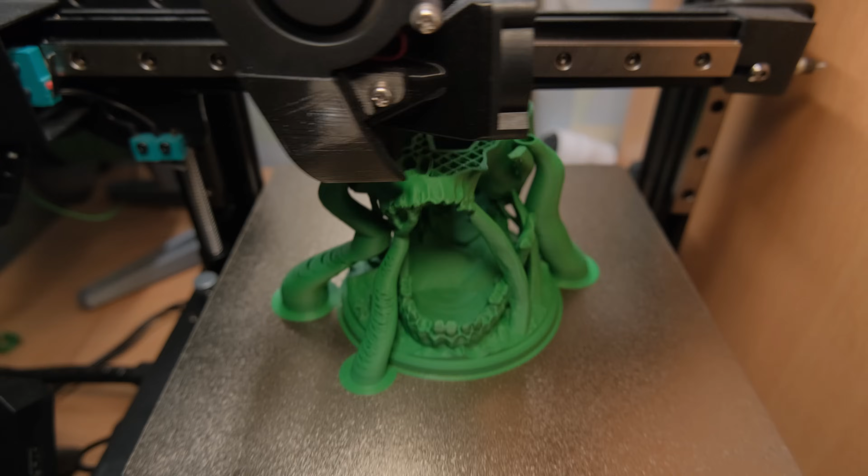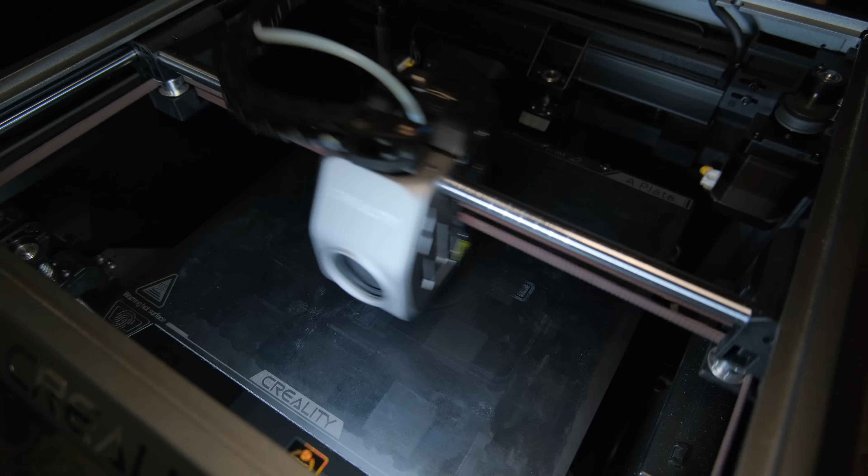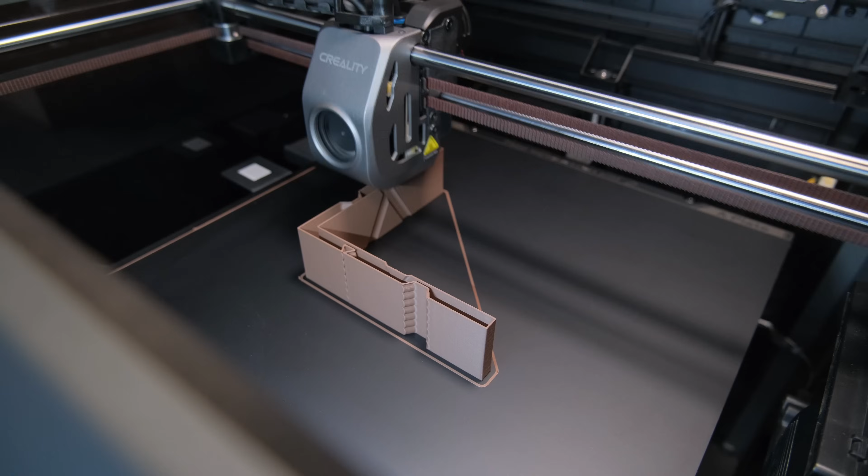Nowadays, almost any printer can make good looking prints. But prints like these hide all the inconsistencies, and unless we test the proper way, we'll never know the true print quality performance of these machines. So to properly benchmark that, I created a series of test prints that expose and will show the true capabilities of these printers. So do Creality K1 and K1 Max live up to the print quality standards of Bambu Lab's X1C? Well, you must see every test to actually get a grasp of what the real difference is.

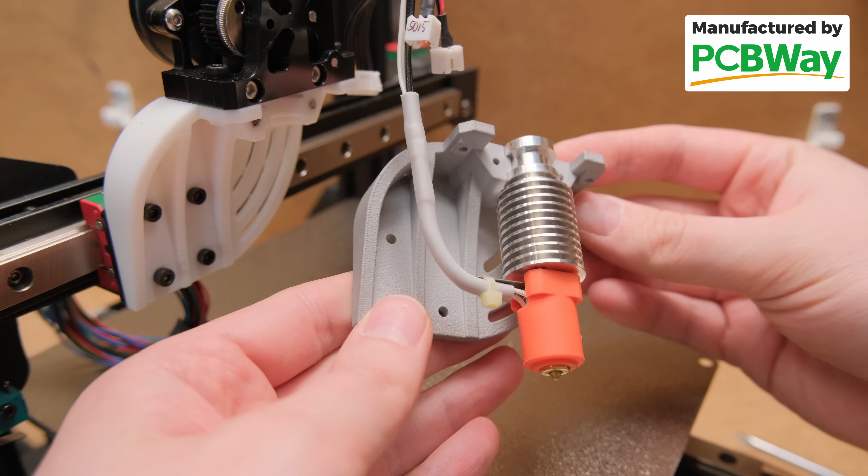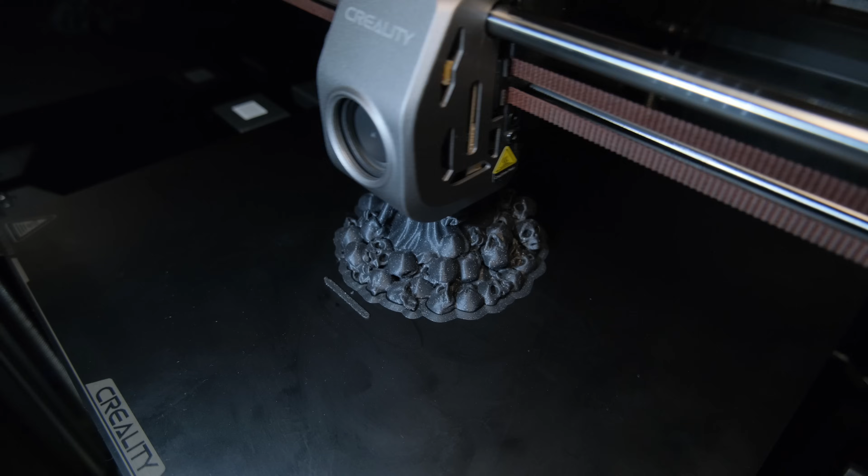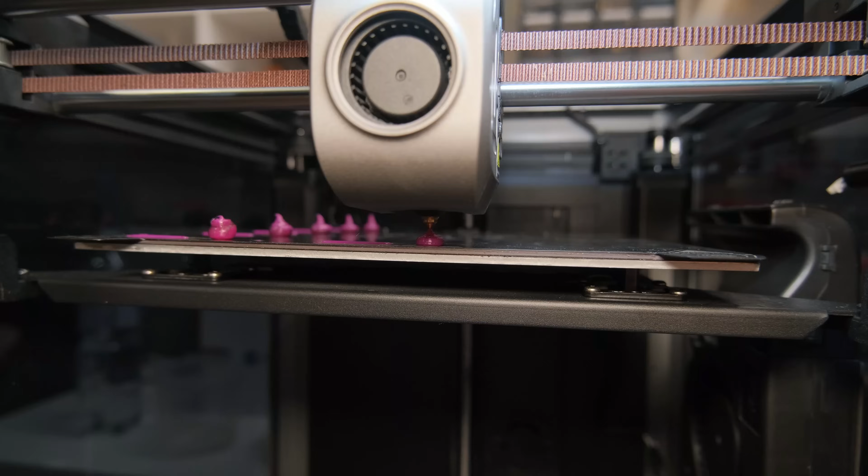A very important note before we dive into the testing results is that both of the printers were updated versions, both hardware and firmware wise, and they didn't have any mechanical problems as they were shipped in an insanely secure plywood case by Creality. I like to start with determining the actual max flow of the printers, as companies really like to overstate their numbers. And there was no surprise with K1 and K1 Max printers. Both fell short and capped at around 20 cubic millimeters per second of constant extrusion.

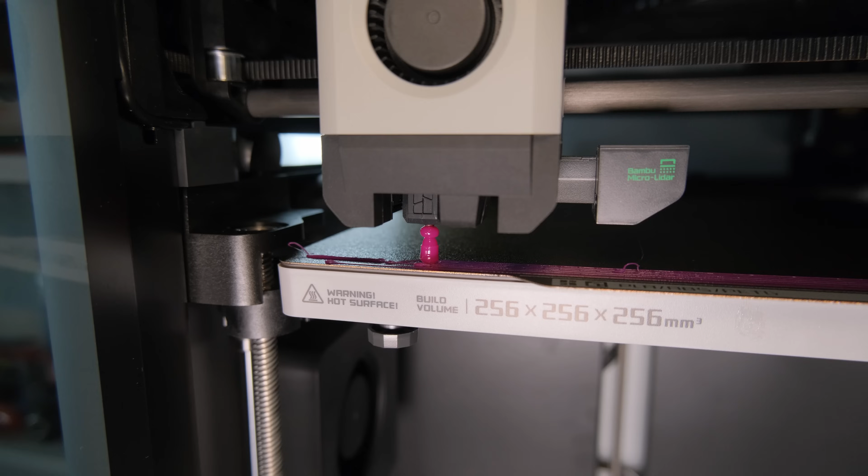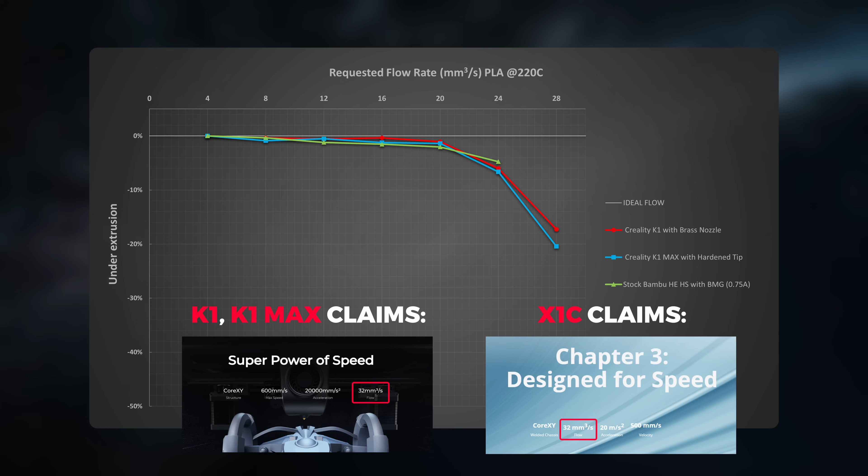Measuring the X1C hot end performance is impossible on the printer itself, as it prevents over extruding, but I have tested the hot end on another printer in the past and it started struggling after those same 20 cubic millimeters per second, so neither printer comes even close to those marketing claims. So great, they can both melt the plastic, but can they also sufficiently cool it down? To test that, I'm using my model, which is designed in a way that if it doesn't have any defects, the cooling is fully sufficient to print PLA with high overhangs.

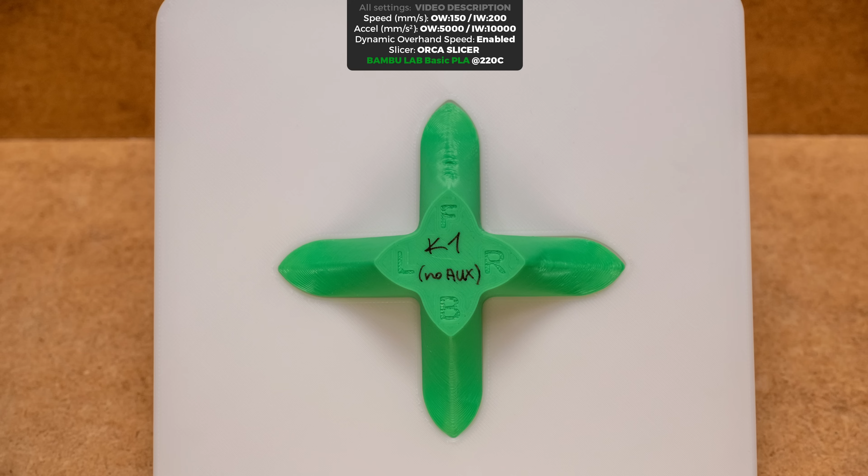The smaller K1 with only the printhead fan active performed great on the left and the back sides of the print. But it struggled with the front and just a tiny bit with the right side. This means that the fan duct doesn't have an optimal design to cool all sides equally. However, the print looks perfect if we additionally turn on the auxiliary fan. You might think that the cooling performance of a bigger K1 Max would be equal, as both printers have identical printheads. But because there's so much more hot air around from the heatbed, it performs worse in both same directions. But again, it all changes with the auxiliary fan on, making a perfect print.

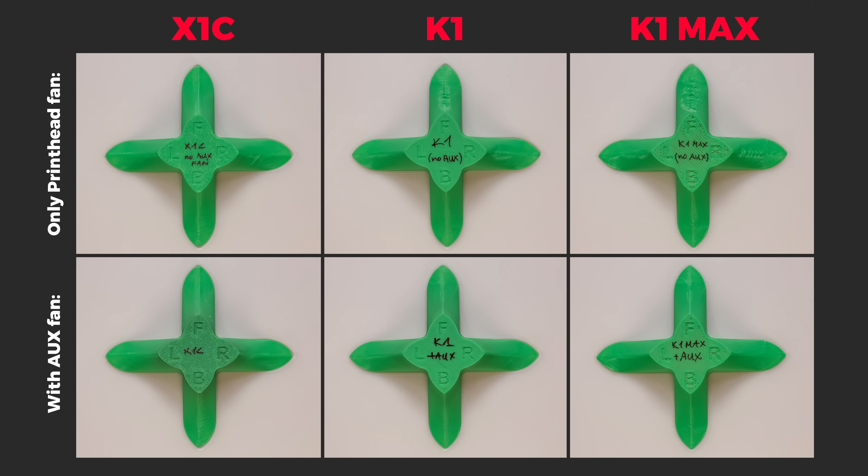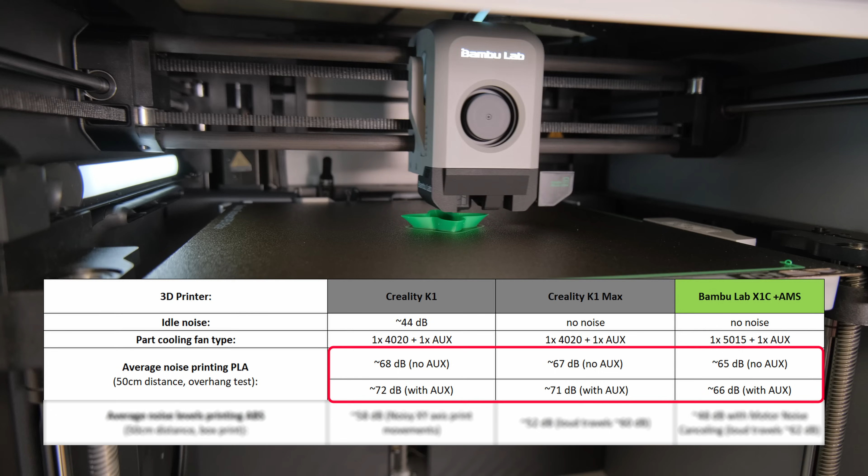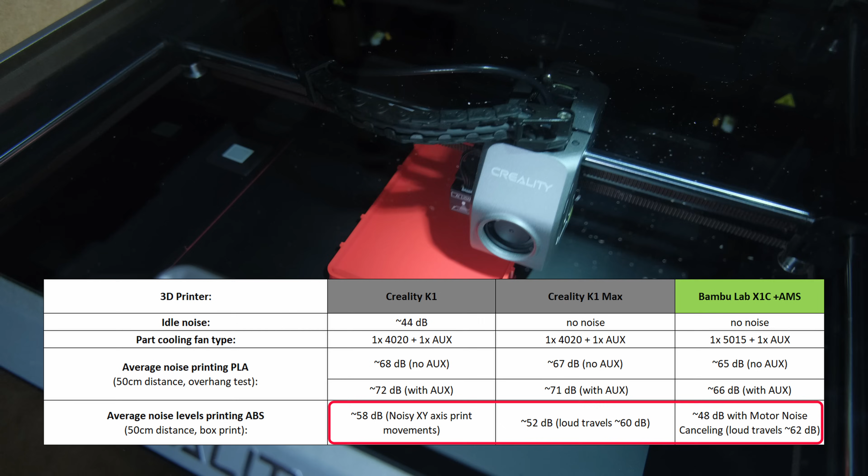In comparison to the Bambu Lab X1C, both K1 and K1 Max fall short when only using the fan on the printhead. And with the auxiliary fan turned on, all these prints look flawless. But what's impressive here is that X1C is beating both K1 series printers while making lower noise levels. But what about when printing enclosed? In this aspect, K1 Max feels the quietest overall, while X1C with a recent update that implemented motor noise cancelling makes a huge difference on straight lines. When traveling and doing fast movements, it is the loudest printer in this comparison.

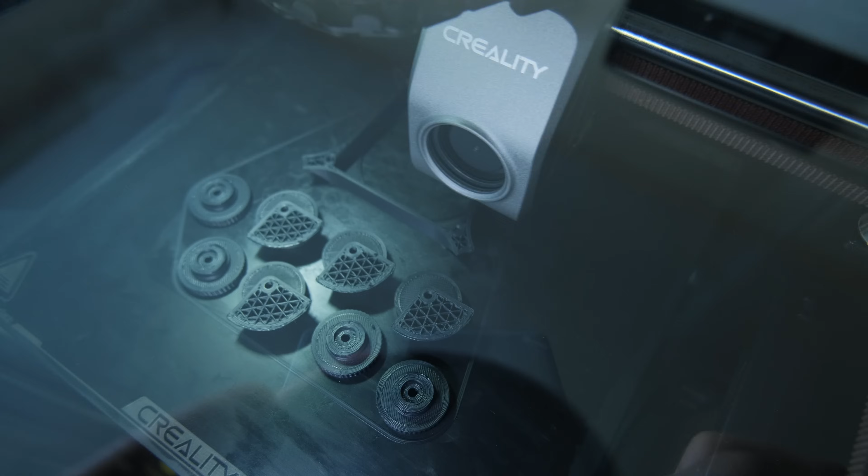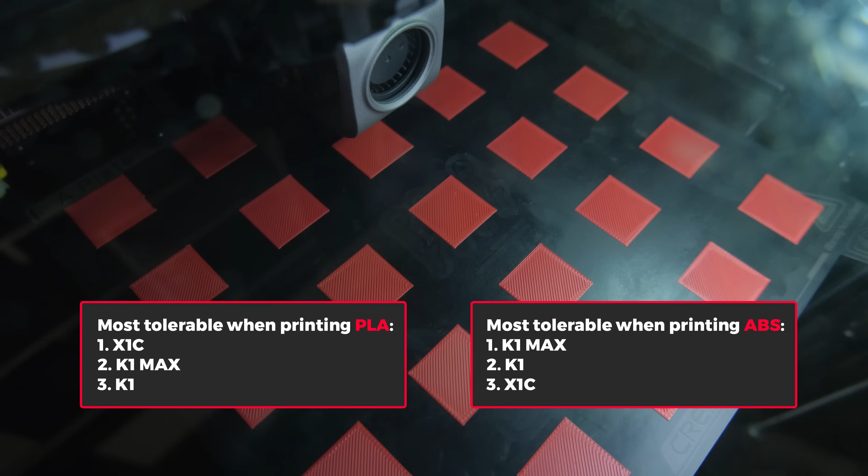The smaller K1 is a strange one, as when printing, depending on the speed, it makes all the frame resonate, and sometimes it can be way more audible than even the fans. But if I had to list them, the least annoying when printing PLA is X1C, and when printing ABS, the K1 Max. Next we have the extrusion consistency test.

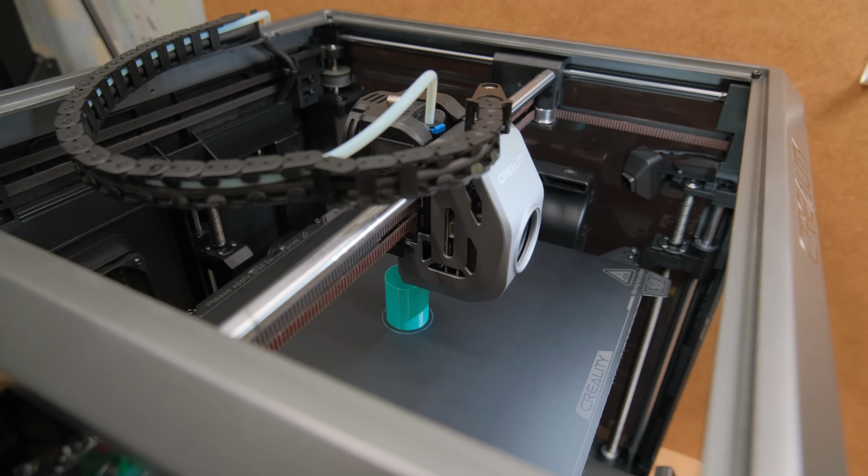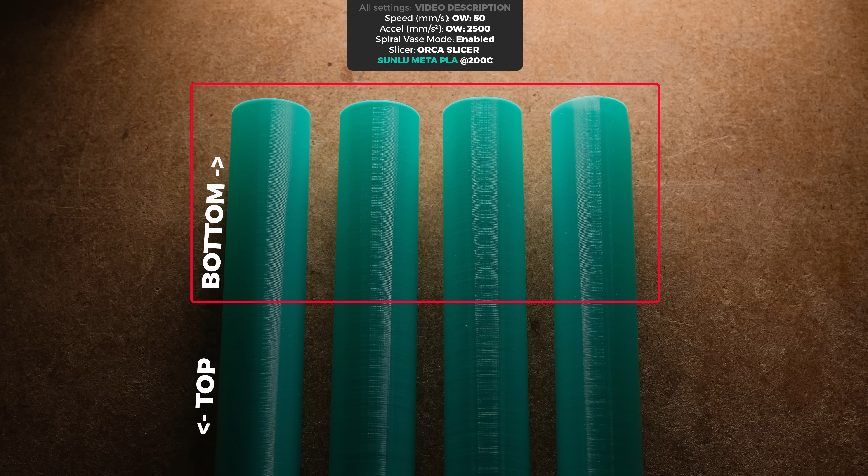This mostly shows, well, how consistently the extruder and hot end can print. Keep in mind that this is a print in vase mode, which makes it thin and flimsy, and the further you go from the build plate, the results will automatically get bad. So the true story is told by the lower layers. Here is where I ran into consistently inconsistent extrusion with both K1 and K1 Max. While X1C results weren't perfect compared to even my budget Voron 2.4, they were significantly better than K1 series printers could produce.

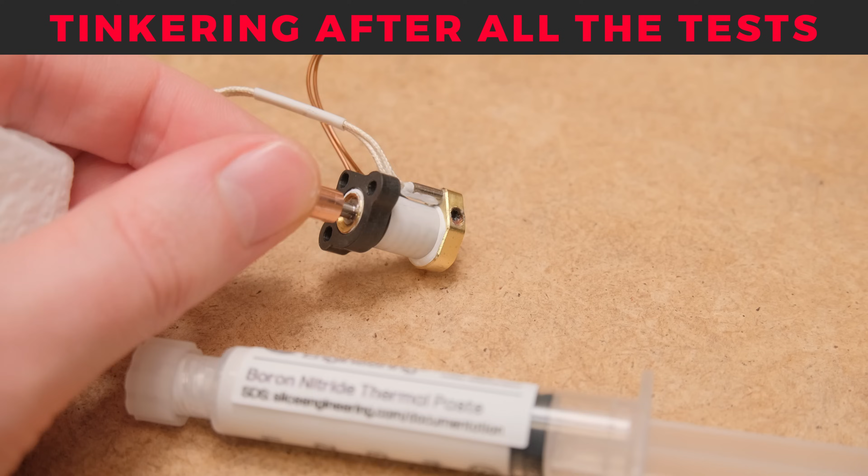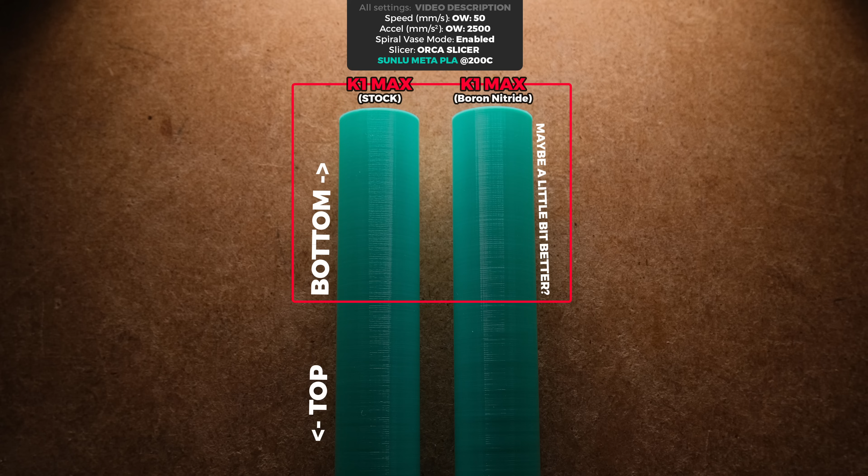Traveling into the future, after I ran all the tests, I wanted to solve those ugly layers. The first thing that I tried was using boron nitride paste on the heater, because the hot end design on these K1 printers feels so junk. It has a significant gap, so we're transferring the heat through a thick layer of low thermally conductive paste. But unfortunately, even a highly conductive paste didn't help, as I could not see any noticeable improvements.

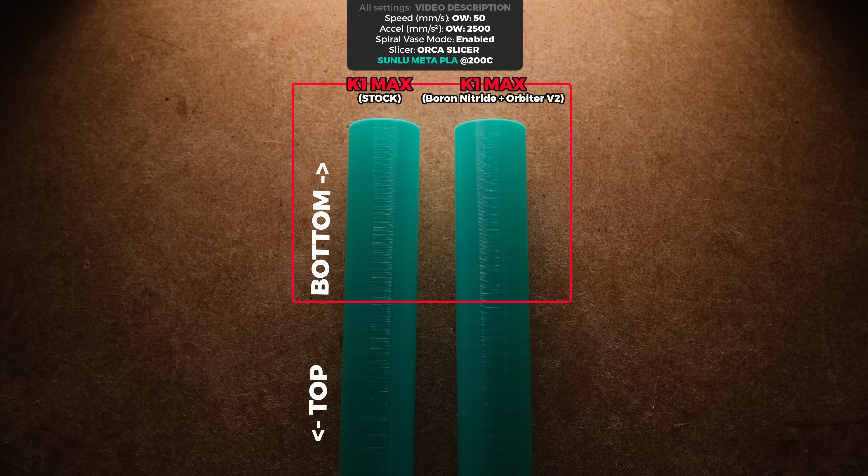I additionally even swapped to the Orbiter extruder to see if the stock one was the problem. That requires you to install the Mainsail or Fluidd interface for proper control and configuration. There are guides online how to do that, and it is quite simple, especially as the latest official firmware for K1 printers is no longer locked down. And the extruder upgrade definitely seemed to help, but realistically, come on, nobody wants to do this on their new 3D printer.

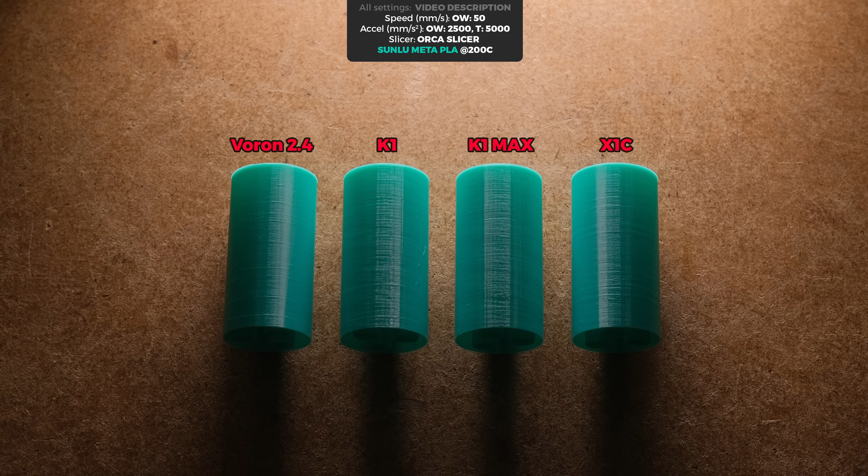So going back from the future to testing the stock printer configurations, next we have a print that will give the most representative look on how good your prints will look with Z-hops that are required for the travel moves. And because we have such an inconsistent extrusion with K1 printers, it is impossible to say anything about the actual Z-axis movement consistency, as layers look automatically bad. I tried checking it with a dial indicator and it seemed perfectly fine, so most likely the main issue is with the extruder and the hot end.

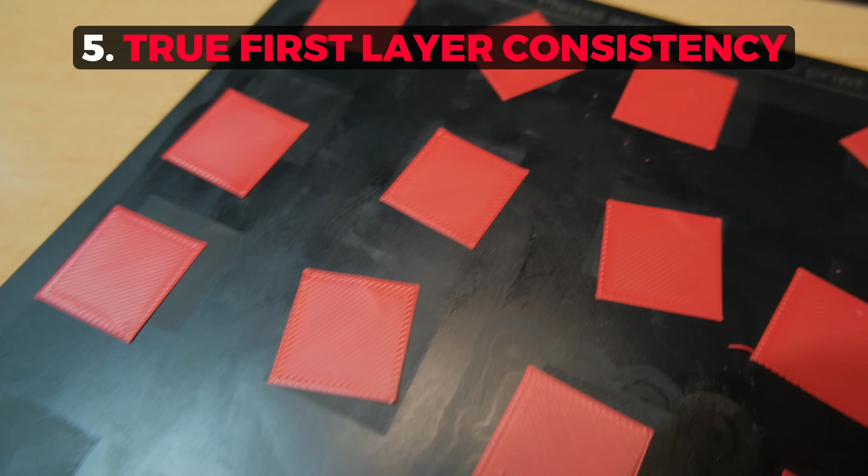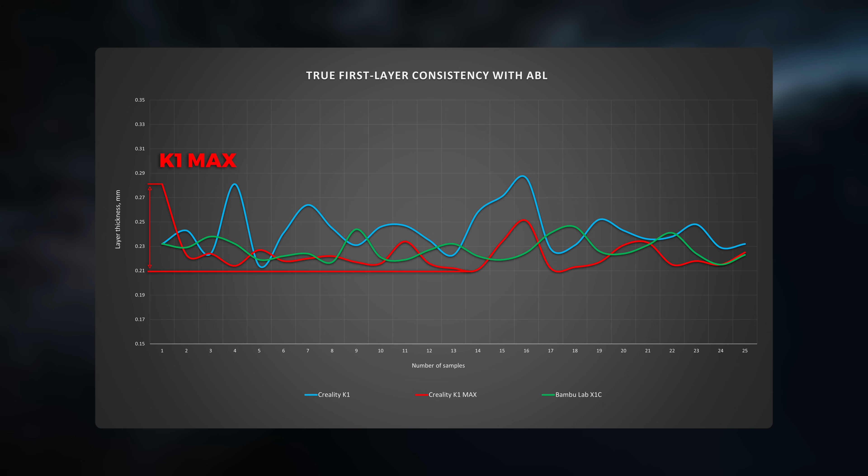However, inconsistent extrusion is nothing compared to the importance of a good first layer. That is why I measure each printed square for the true first layer consistency. From all my printing experience with these printers and from the test results, the first layers of K1 and K1 Max were not impressive. What we want here is to have the least difference in the measured square thickness, but K1 series printers had more than twice the variance compared to the X1C.

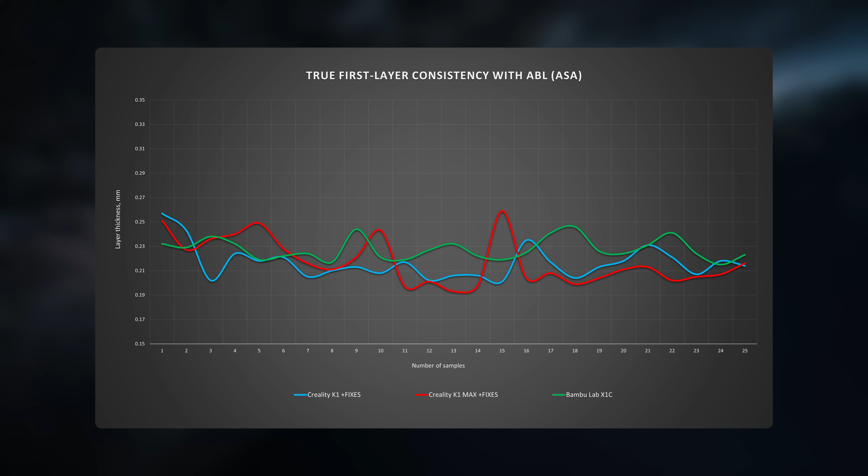But is it fixable? Traveling to the future again, I played with a few settings that are tied to the bed mesh in Klipper. While the results were still not on par with the X1C, they were better. So again, let's go back to testing the stock versions of K1 series printers, and unfortunately they can't even get a break at input shaping test results. Although they run Klipper, which has an excellent input shaping implementation, prints here have ghosting artifacts even at low accelerations.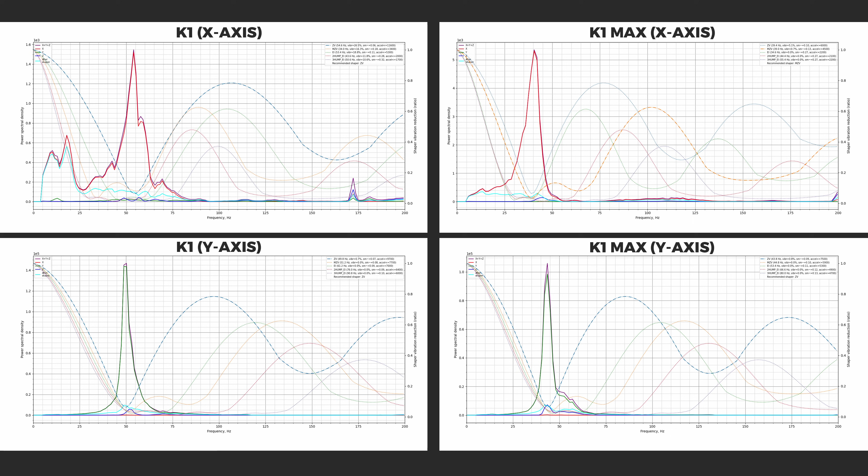But what I found out after all these tests is that their customized input shaper runs only on the Y-axis, and the script always applies EI type of shaper results to both the X and Y axis. On K1 and K1 Max, peaks of the X and Y axis vibration frequencies are not that far apart, but the actual recommended input shaping frequencies differ by a lot. So the way Creality has implemented the input shaper makes no sense whatsoever.

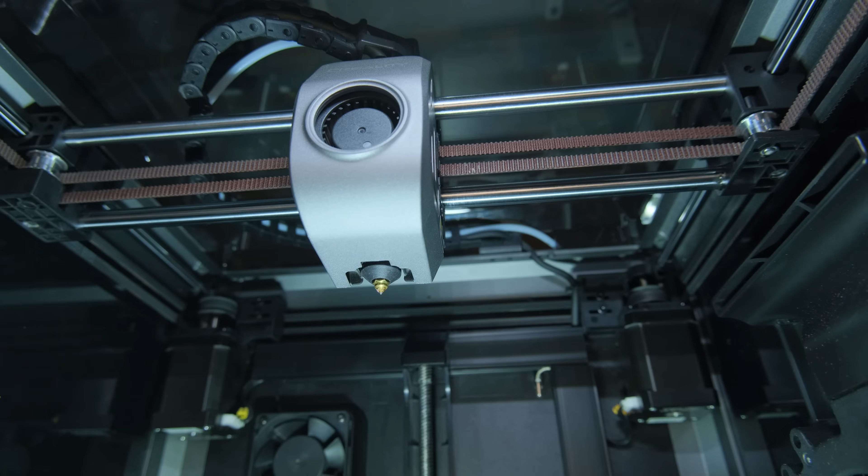However, even when I calibrated the input shaper for each axis independently, I got only tiny improvements. My best guess would be that vibration frequencies are significantly different at the tip of a nozzle, or the motion system is too wobbly in general to predict vibrations accurately. Going back to testing the stock printers, I ran a print to see how well they printed the details. This requires tuning the pressure advance value on each printer for the most apples to apples comparison. I don't know about you, but I couldn't see any real difference in this test.

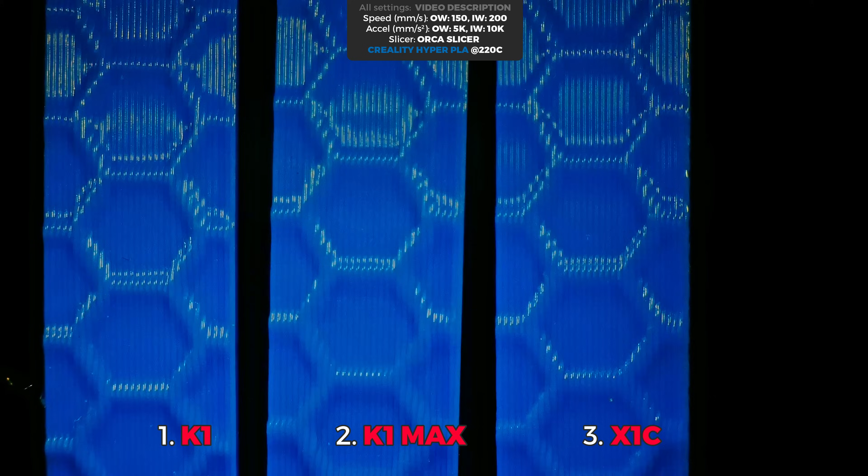But where I could see the difference is with the X versus Y print results. Here we want the print to be the same length when printing on different axes. After all, these are enclosed CoreXY printers, so the accuracy of the practical prints is very important. To measure that consistently, I made a jig, and these are the results. Again, X1C performed better compared to the K1 series printers, but neither of them was even close to my budget build Voron 2.4, which is kinda crazy when you think about it.

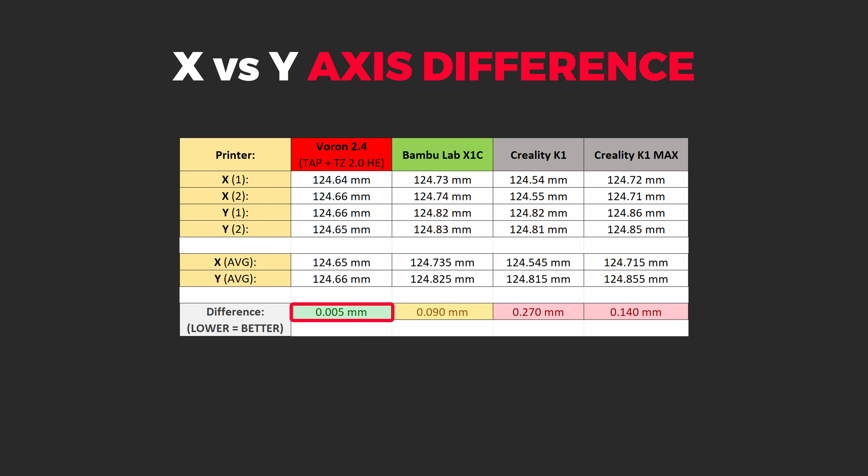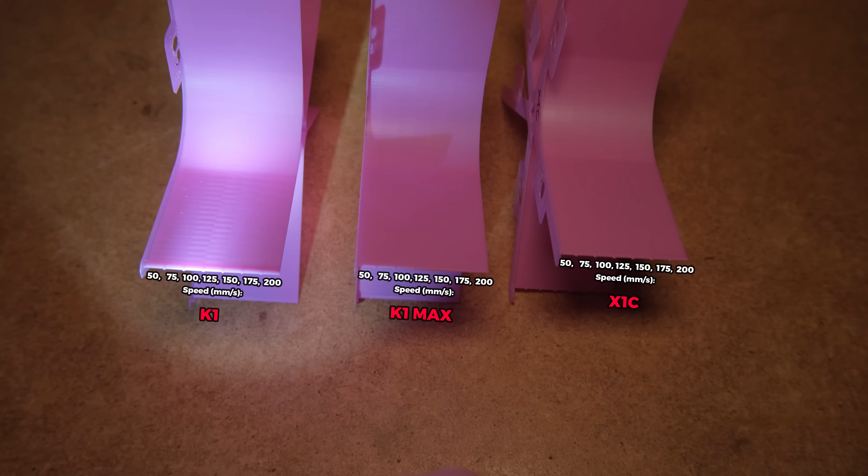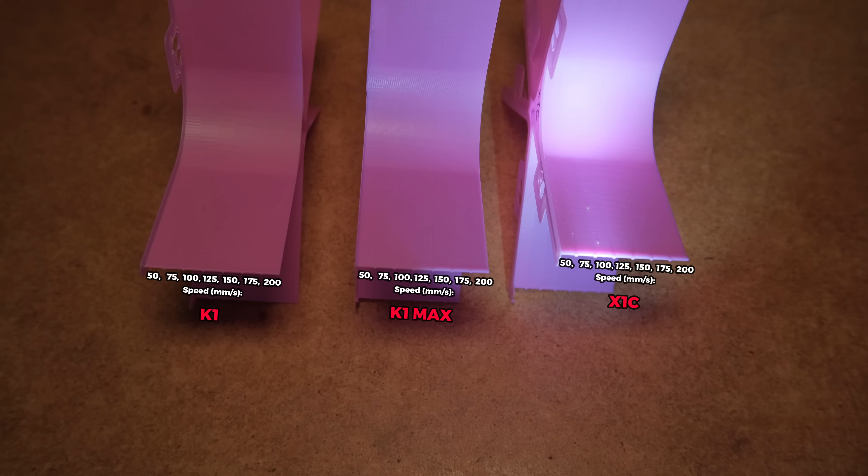Another 3D print quality aspect that I feel is overlooked is the vertical fine artifacts that are created by the stepper motors at different speeds. K1 results here look quite poor, with a very narrow window of speed where the print looks good. K1 Max performs much better, but those results are miles away from the X1C with a newly released motor noise cancelling feature.

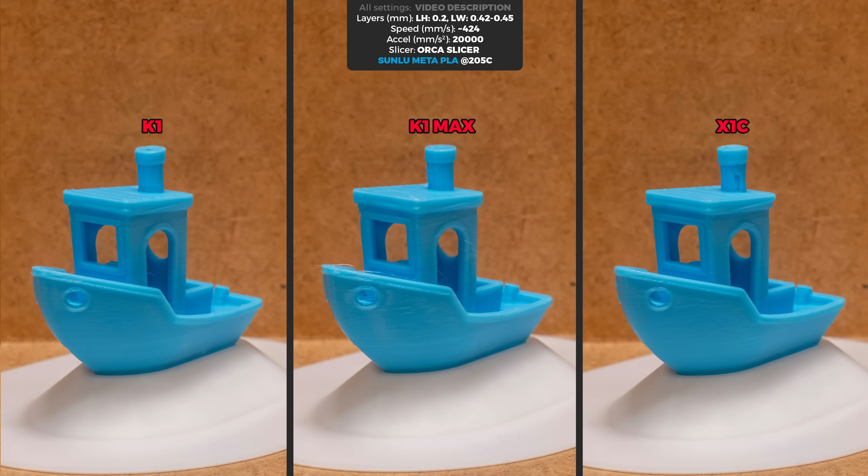And finally, the good old 3D Benchy print. Here I'm pushing printers to the maximum speed that is limited by the max advertised flow of a hot end. Surprisingly, all the prints looked quite good considering we're using the max advertised accelerations. Even a bigger K1 Max produced a decent looking print.

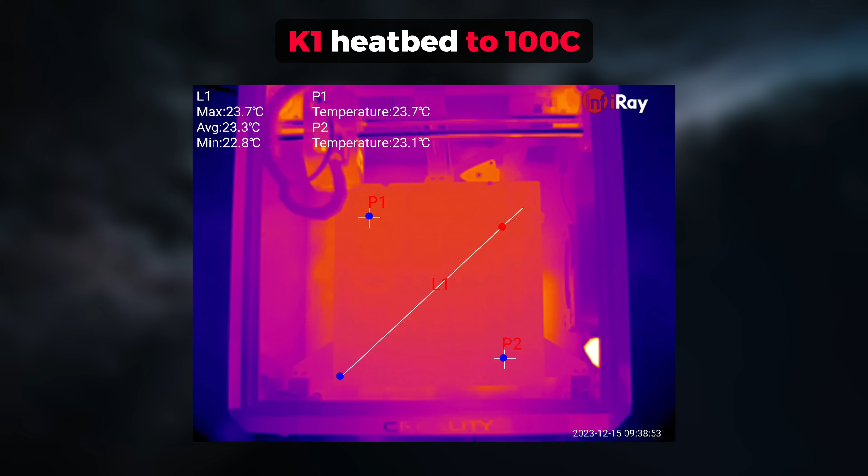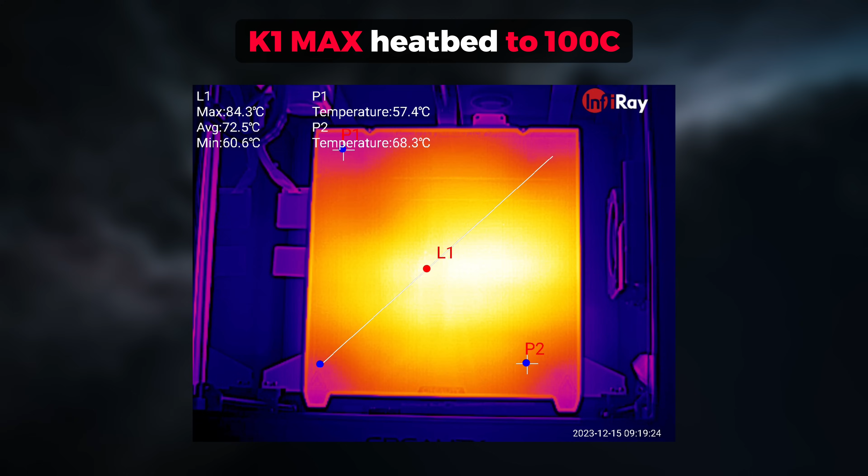Also checked how fast and how evenly heat beds are heating up. K1 required only 5 minutes to heat the bed to 100 degrees Celsius, and it had around a 10-degree difference in temperature on the build plate. Meanwhile, the heatbed of the K1 Max, which has a way more powerful AC heater, required around 9 minutes and had a 13-degree difference. And finally, the X1C took around 5 minutes to heat up evenly with only 5 degrees of difference.

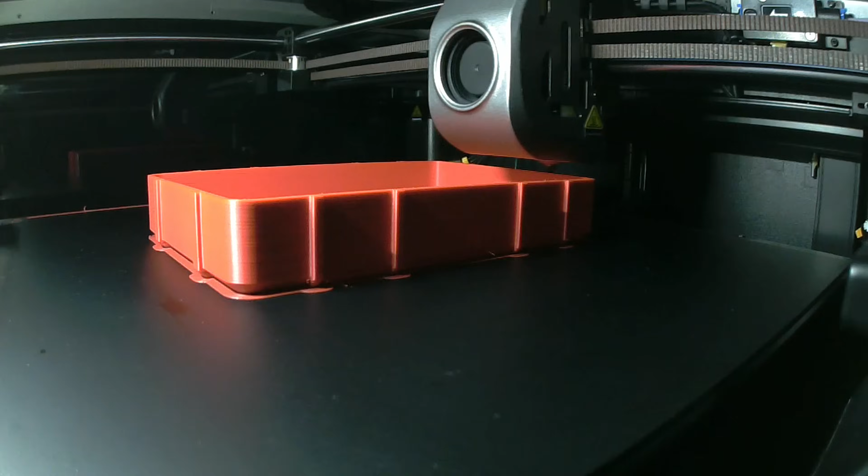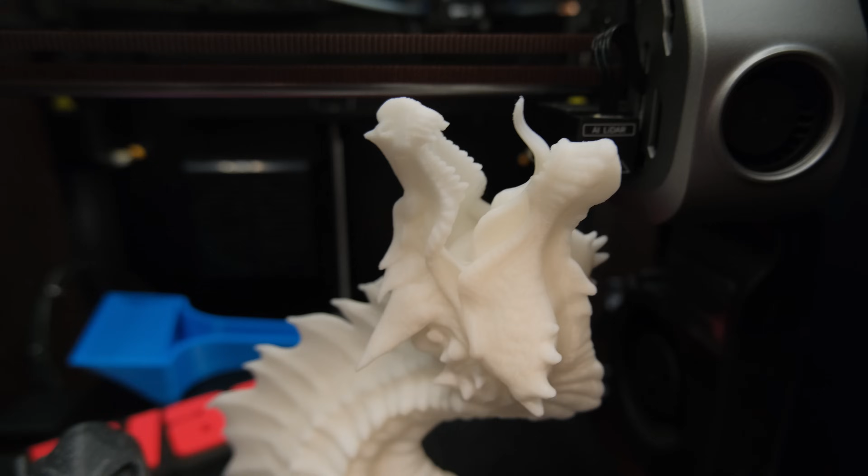So what are my overall thoughts about these printers? First, the K1 Max. You know there's a saying, there's no bad product, just a bad price? Well, at $900 it falls in a complete no man's land. Anyone spending that amount of money expects a polished product that prints great. Well, I can show you nice looking prints from the K1 Max that hide all the inconsistent layers due to their nature of being all curvy and stuff.

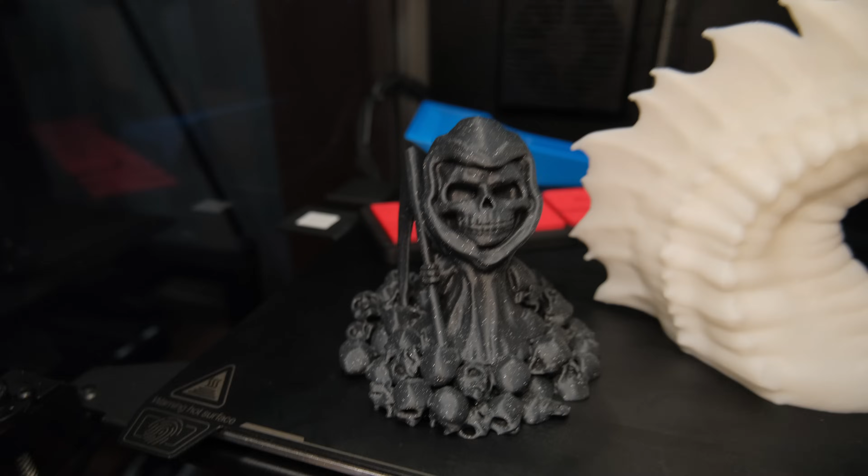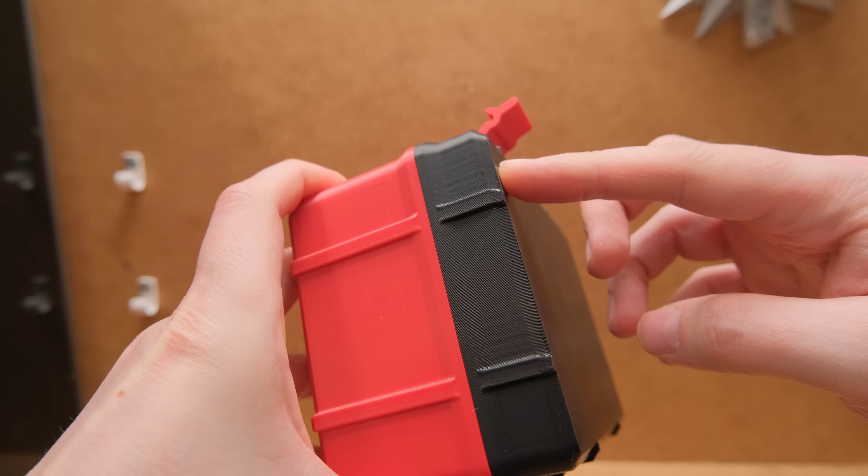The reality is that if you are buying an enclosed Core XY, you probably want to do some practical printing. While it prints fully usable ABS, ASA or TPU parts, those are nowhere as good as from X1C. They are plagued with inconsistent first layers, ghosting artifacts, some random extrusion problems, and bad looking layers. Not to mention that you can't easily make your bed as flat as possible like on the X1C with manual leveling knobs.

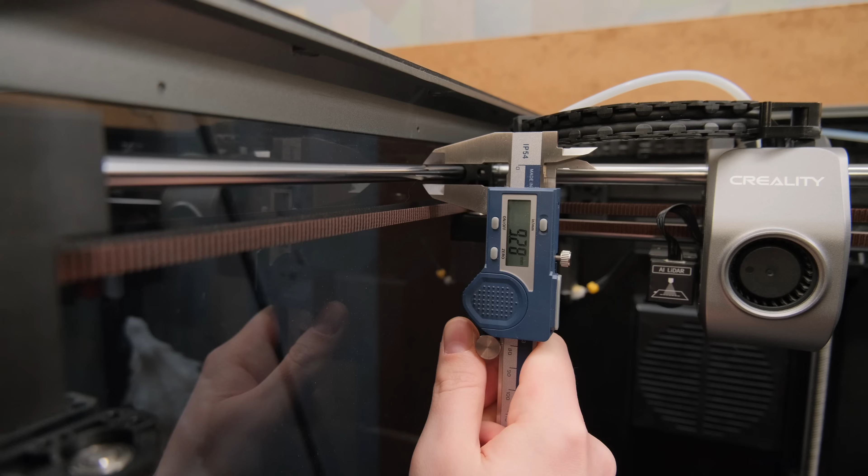K1 Max feels like a lazy upscaled frame version as it doesn't even have thicker rods compared to the smaller K1, and the motion system feels extremely flimsy. Considering that P1S costs less and is basically the same printer as X1C, K1 Max feels just irrelevant.

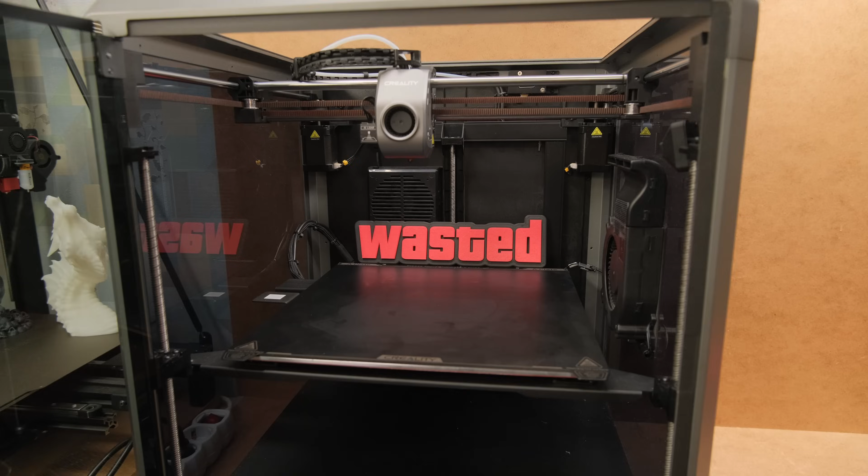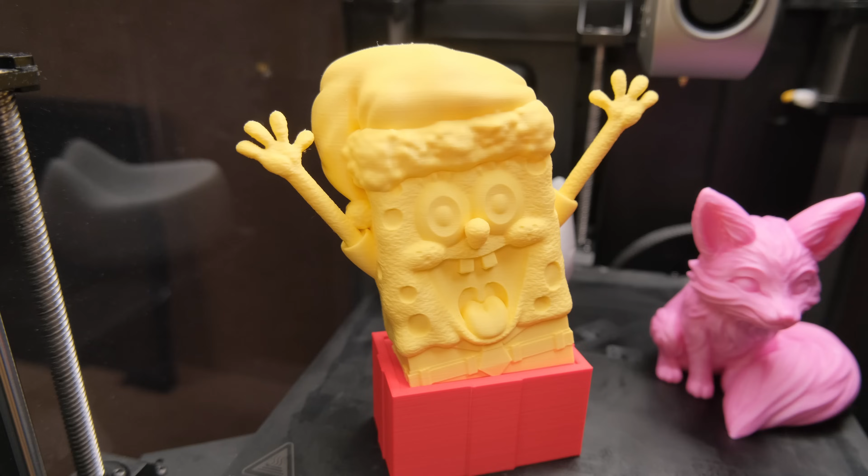But what about the smaller K1? I feel like this is a way better deal, but it still needs a lower price as $500 feels too much for the performance that you get. Again, will your printed SpongeBob or any similar stuff look bad? No, it will look great. The prints that will look bad will be those that require the most consistent precision in each layer.

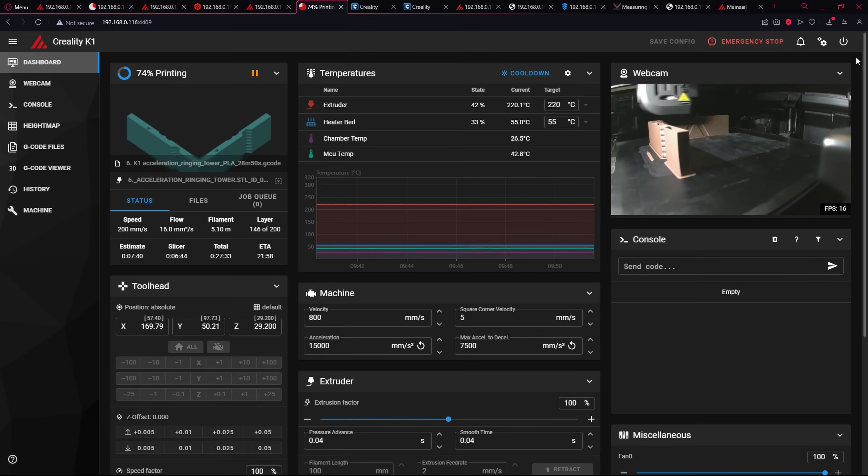I think K1 with a lower price and with all the problems fixed can have the potential to be the budget Core XY option that runs Klipper and you can configure to your liking, plus you know that there'll always be some crazy mods for Creality printers. Overall, I feel like K1 series printers were rushed.

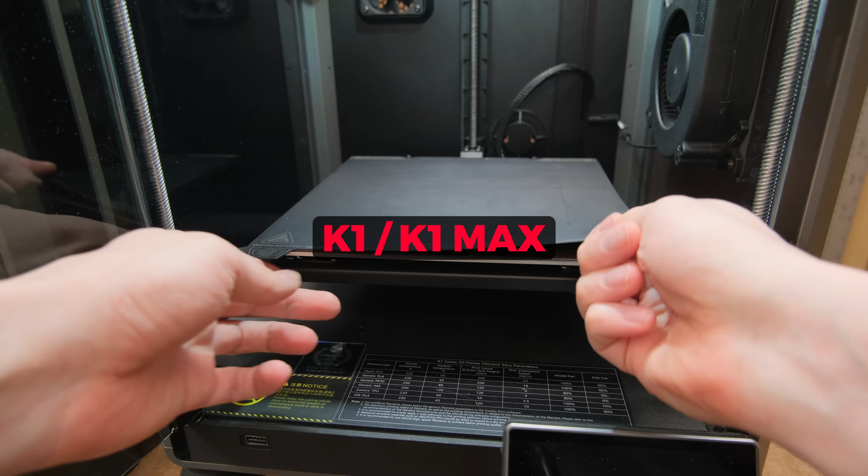Yes, they have some better design decisions than even X1C does, like lead screws are less in the way and you never bump your print plate into greasy lead screws, and the bottom is flat and not like a trap for all the trash from the prints like on X1C.

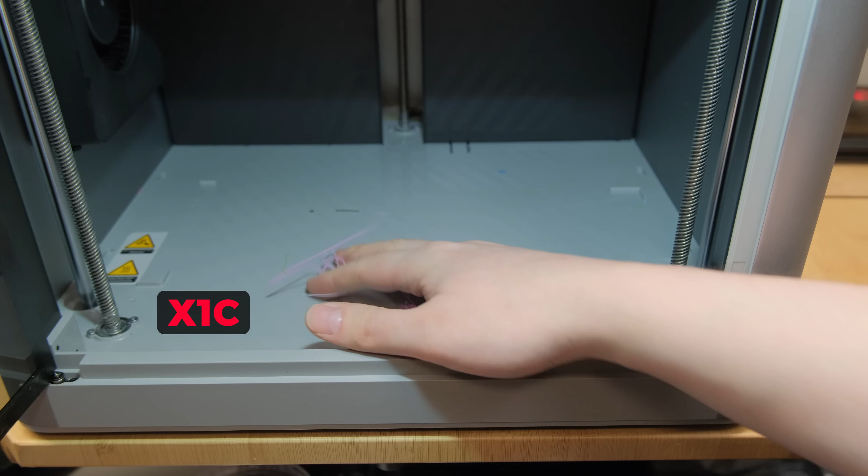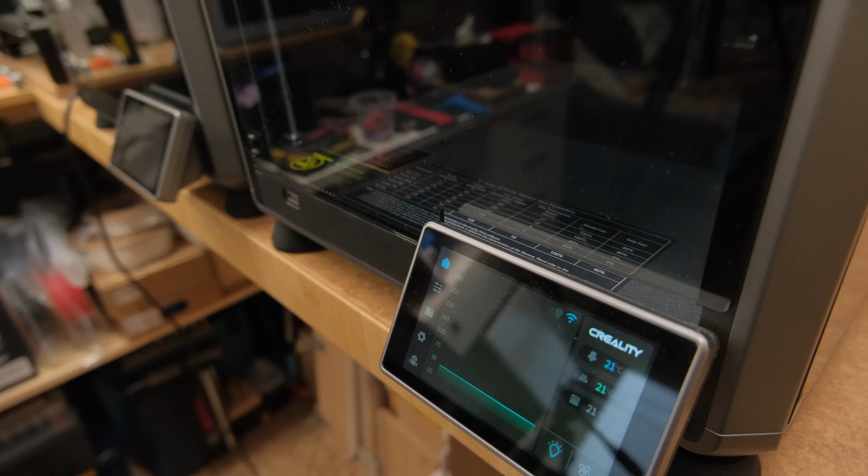But then there are design choices like fragile glass door, having a wrong type of hinges that almost always close from vibrations, or even worse, multiple gaps that let hot air and smell out of a chamber, the fact that you can't load filament unless you hold the PTFE tube straight, or the use of graphite impregnated bushings with grease rather than long-lasting ball bearing ones.

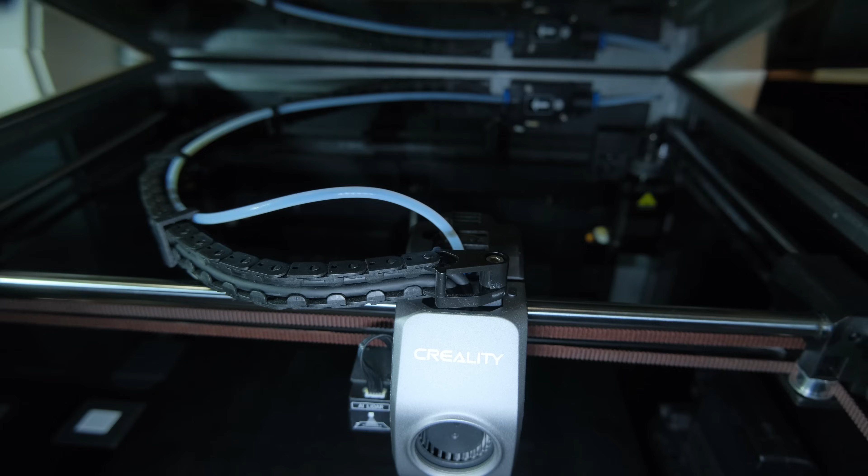I really hope Creality won't abandon these printers and keep working on fixing the problems I talked about in the video, because there is some potential for them to be decent printers.